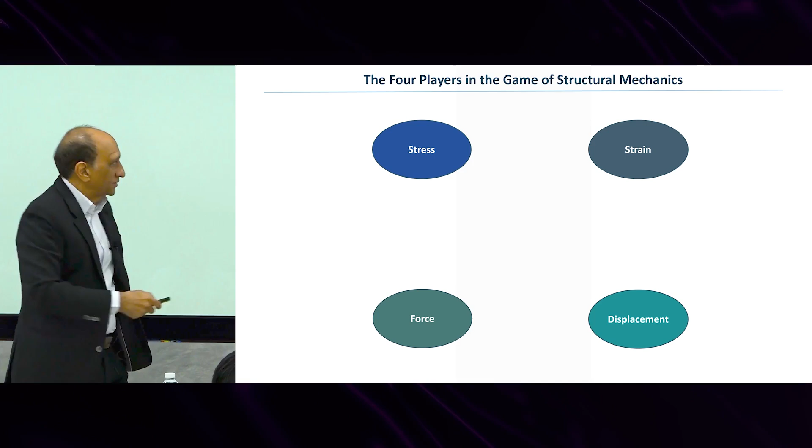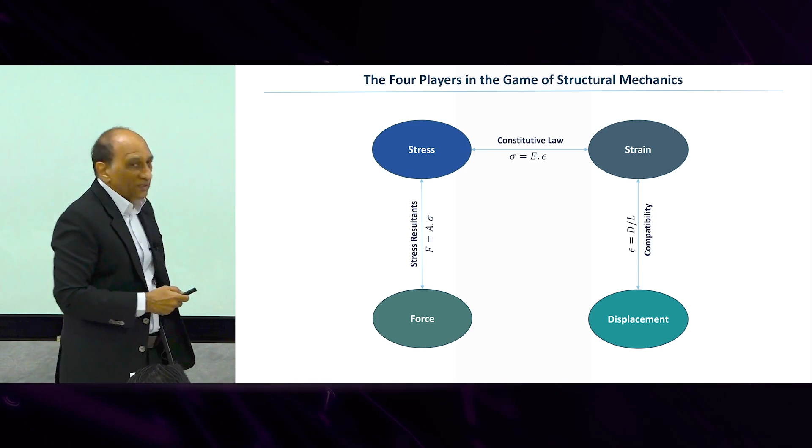Stress and strain is a constitutive law, we all know this basic relationship. The relationship between stress and force is stress resultant. The relationship between strain and displacement is compatibility. And the relationship between force and displacement is equilibrium. So we have these 4 relationships that exist between them.

We can start from one, depending upon what is available and what is not, and move around this cycle. But the problem is, many of these are only good in a linear elastic system. As soon as things become nonlinear, inelastic, many of these relationships in the traditional sense will break down, and that's where the problems start, and we'll have to update them. So we will keep coming back to these 4 players time and again.

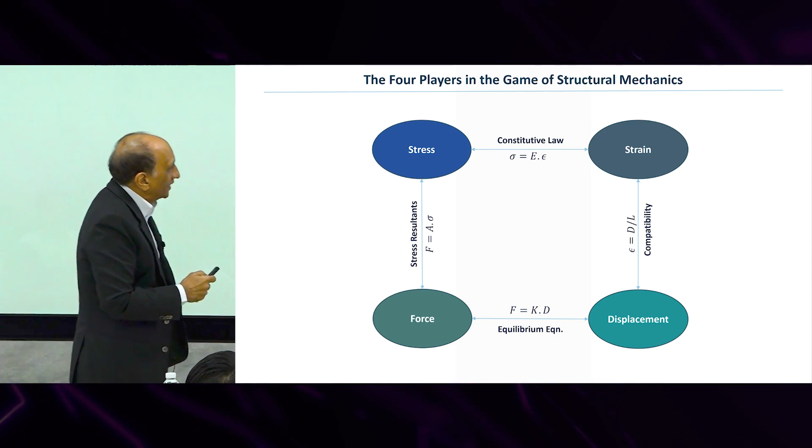Now that we have them, let's look at force to deformation. Currently it's easy: we have the equation for the elastic response, so we can calculate the deflection based on linear stiffness, so it's very clear. We know the force, the moment, we know the deflection, the formula is there, no problem.

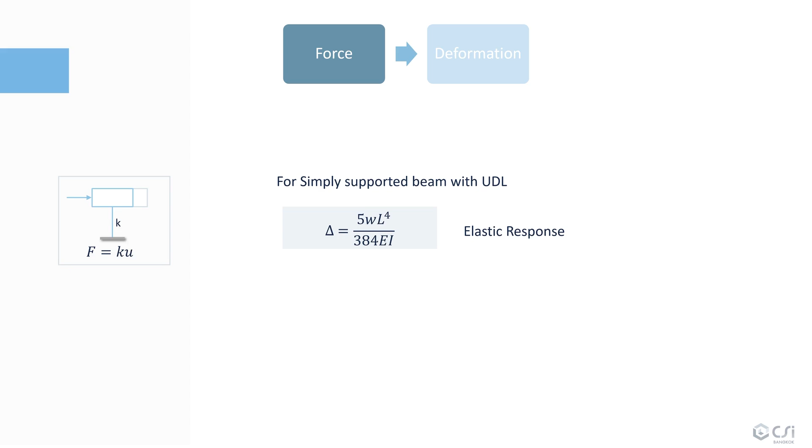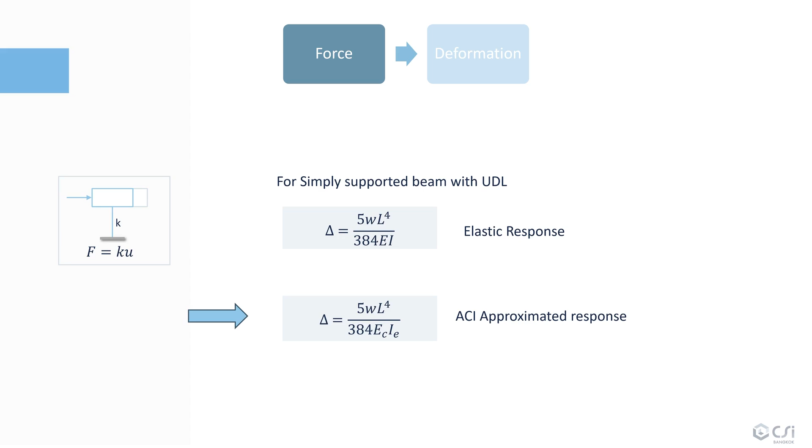But ACI gives us the force and displacement, KU, stiffness equation, and from that relationship we can calculate deflection. But immediately we have 2 different equations for the same deflection now: one coming from the elastic response, the second an estimated pseudo-nonlinear response, which the code tries to capture by replacing I and E with EC and IE.

Both of these are arbitrary, and different codes will do it differently, which means if every code has a different number, all of them cannot be correct. Which means all of them are wrong by simple logic. So something is already missing in this part at a very basic level.

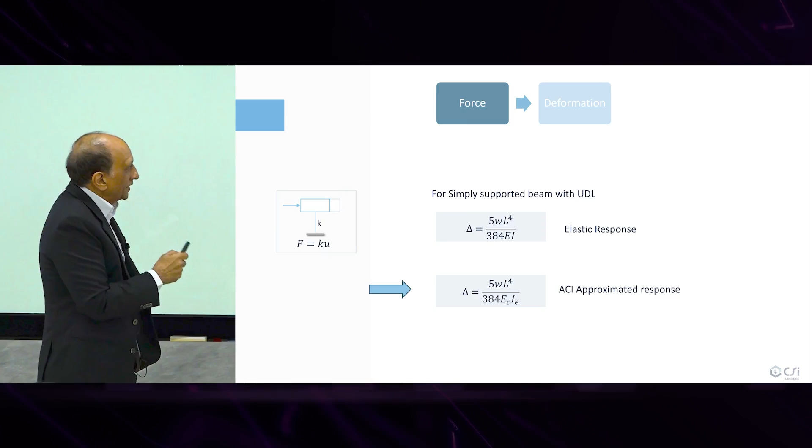So let's go to the second one, this is very interesting: load to stress to strain path. We think traditionally that if you know the load or force, you can calculate the stress, and from the constitutive law you can calculate the strain. This seems obvious, and that's what working stress design has been, and all design in the past has been like that.

But let's see what happens. This is a small column. So we go from applied load this way, load to analysis. In this case, simple analysis: member action, which is simple P, cross-section action, and then stress strain. The area is like that, so stress is equal to P over A.

It's very simple. So if we do that, and try to jump from stress to strain, we need the constitutive law, which is not simply E — it's a stress-strain curve that defines the whole path, not just a simple modulus of elasticity. So if the stress is here, I immediately get a problem: now I get 2 strains for the same stress. Which means the problem is no longer unique, because for the same stress there are 2 possible strains.

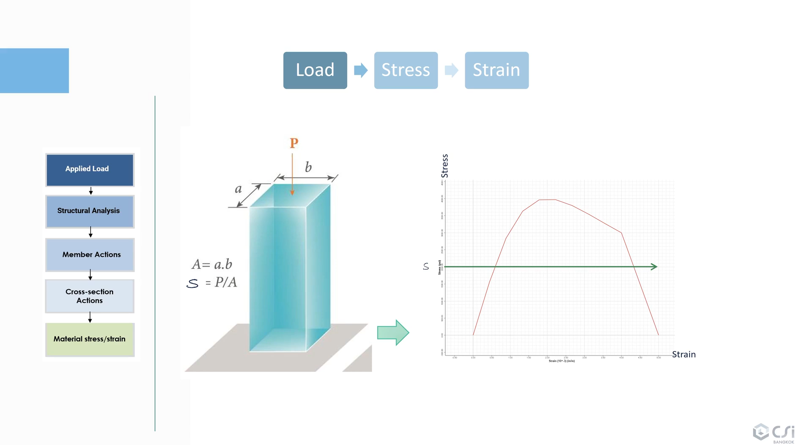And at some stress, there is no strain at all. Which means this is not a reliable way to proceed, because you're not sure of the outcome of this stress-to-strain value. Because once it's no longer linear, E is limited, so for certain stress there won't be any strain available, and for certain stress there might be two strains available, which means this is not a good path to follow, because it doesn't give you a unique and reliable strain.

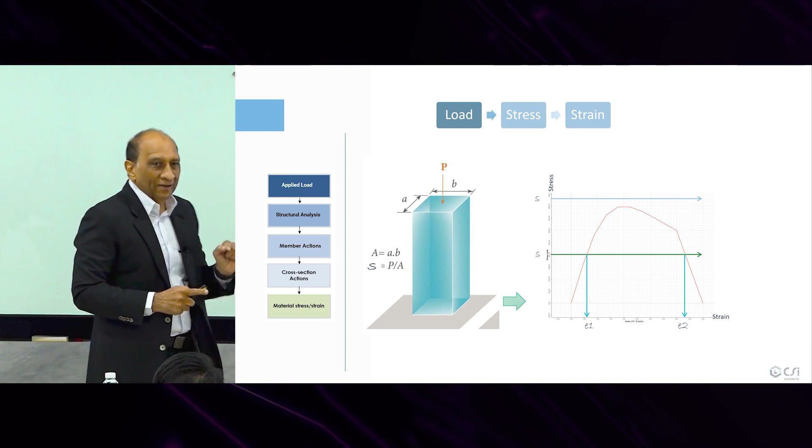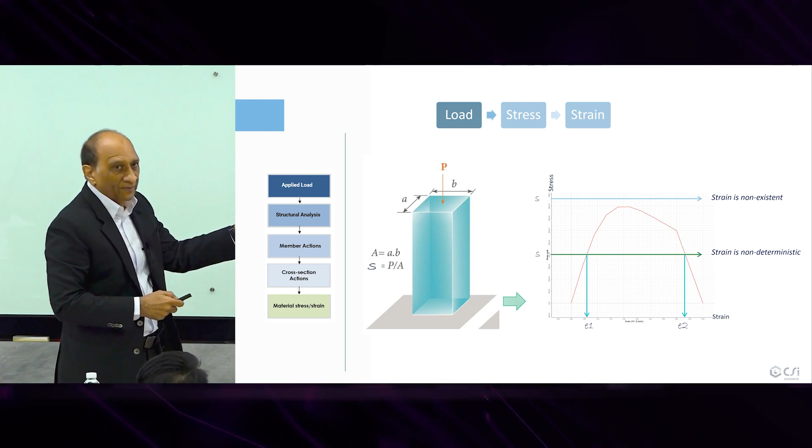So that means we must reverse this. We should do the other way, because strain is non-existent and non-deterministic in that direction. So we have 2 problems straight away. Let's reverse it: strain, stress, to load capacity. Now we have no problem, because if I do it this way, I don't need to know the load in advance.

I have a column on which a certain deflection delta has taken place, deformation has taken place, and for that delta there's a certain strain produced, epsilon equals delta over L, and for this strain I can go to the stress-strain curve and calculate the corresponding stress.

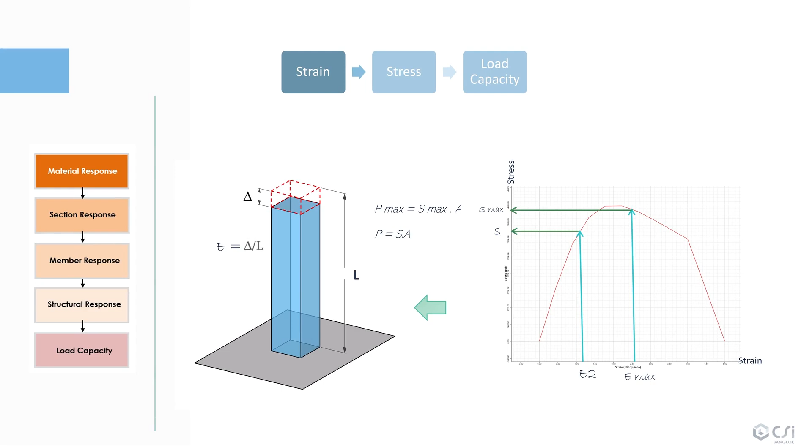This is a unique solution now, that for every strain, as long as the strain is within the limit of the material, I will get a unique solution of the stress, and I can calculate the corresponding capacity from that, and get P max and the capacity. This means a valid solution is guaranteed.

So this is what we follow these days for the purpose of investigation. Start from the material response, go to section response, and then to load capacity. We go material response, which is the stress strain curve, then section response, which is the area, then member response, which includes the length and so on, then structural response and load capacity.

Then we can check that load capacity against the applied load to calculate the real factor of safety that is available. It's like a summary of the pushover analysis, because you calculate the real, true capacity based on the material.

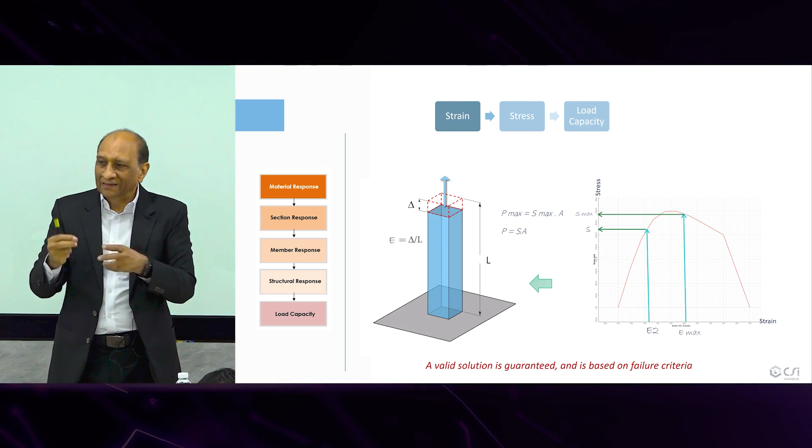So now if you have a particular structure to evaluate, you start with the material, testing actual material numbers, actual cross-section, and you can calculate the capacity very reliably, then compare it with whatever loading you want to compare and see if it's valid or not. This reverse direction works very well, and becomes the basis of all our further development.

All right, so then we get the P from there.

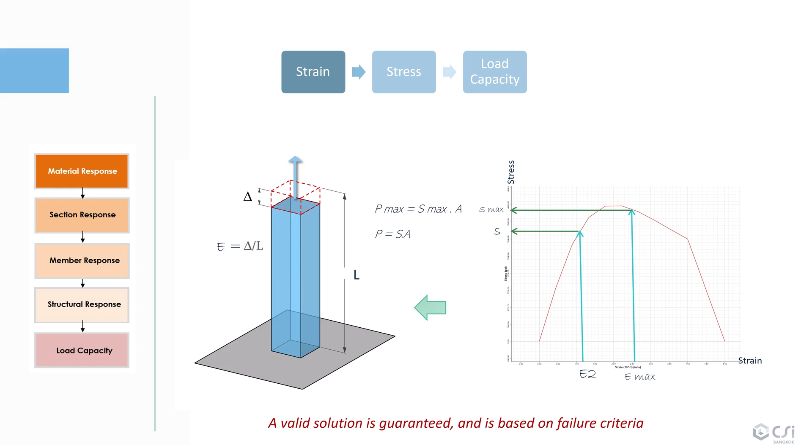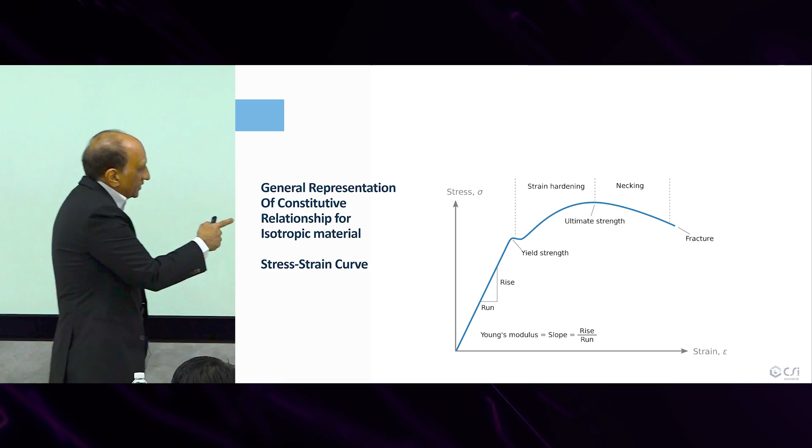For the constitutive law, we know that the stress strain curve has all the information that we need. We have a stress strain curve with the stiffness, yield point, strain hardening, necking, fracture, and this can give you a lot of information about the material, for example ductile, non-ductile, brittle, and all of that, and post-elastoplastic.

So we can define all of that. We can define linear elastic, linear inelastic, non-linear elastic, and non-linear inelastic. So you get four material responses from there, materials of different kind, different deformation type, different relationship type.

So stress strain curve actually gives you all of the information about the material response that you are ever going to need for the analysis. This stress strain curve can be modified by many things, and we will talk about some of them.

So if we have the stress strain curve of the material, we have a perfect starting point for our whole analysis. You have the valid material, and from that you go back and calculate the capacity. So there's no ambiguity problem here, as long as we have tested the material and we have got the capacities.

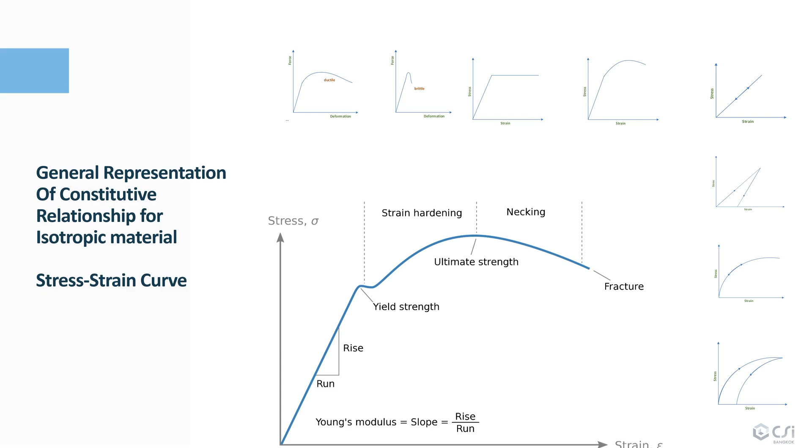Second one is the cross-section. Let's also see how we can unify the cross-section, make it general, because a rectangular beam is not a good sample to start with, since the cross-section can be many things.

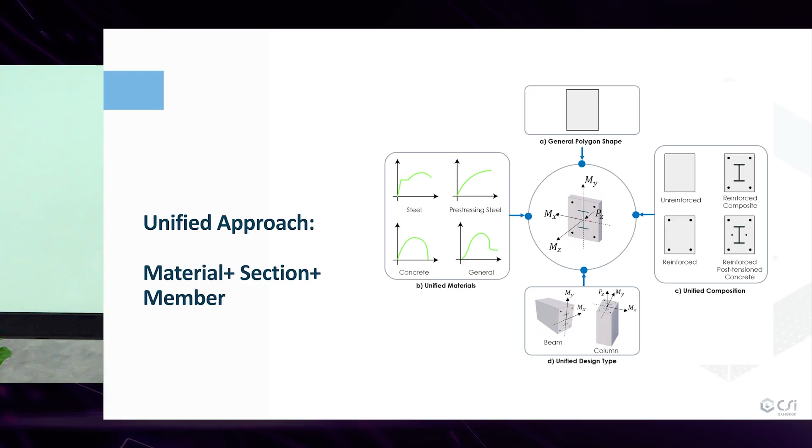It can be reinforced, unreinforced, post-tension, composite. Many things will come up, so many. We need to make sure that we are able to handle a general cross-section, which can include steel, pre-stressing, general materials like carbon fiber or whatever, and concrete of any kind.

So we put the material as a stress strain curve on one side as an input. Polygon, general polygon shape, not rectangle, made from any polygon to define the cross-section, T-section, rectangular, polygon, doesn't matter to us. And then we put the unified type of beam and column, you don't need to differentiate.

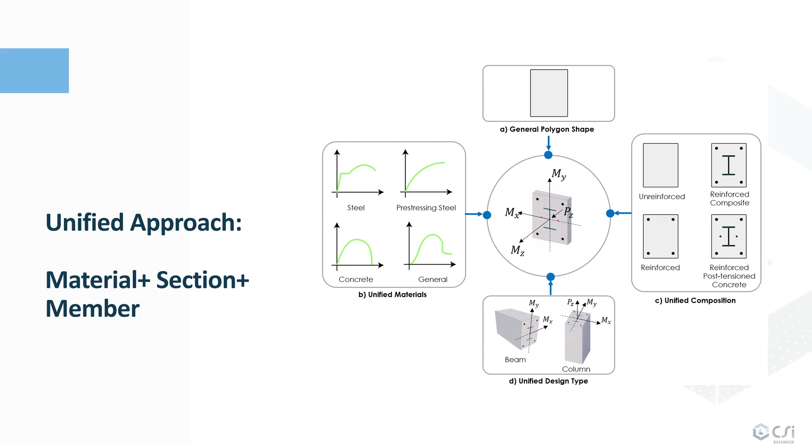We put three stress resultants from there, or five, or from both sides. And then we put unreinforced, reinforced, composite, post-tension, every type of section together. So this is a complete problem definition of a concrete structure of every type. Everything is covered, there's nothing outside this one.

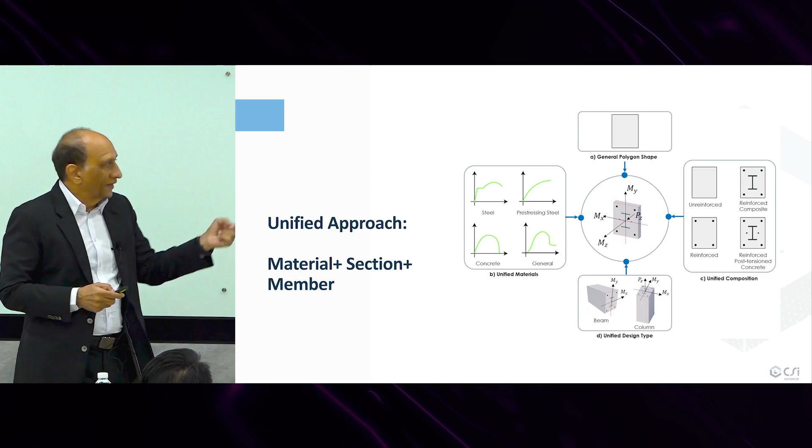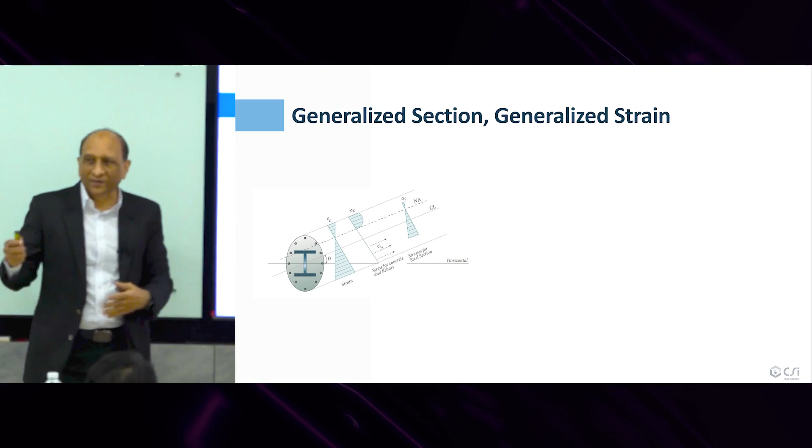So if we take this as our starting point and say okay, this is our cross-section, then we can go ahead and deform it on a certain angular direction for a specified strain, any strain, starting with any strain, just like we did for the previous case.

And then we say, okay, we can come up with these equations for the equilibrium of the stress resultant. So we can integrate all the stress resultants based on that cross-section, based on the material stress strain curve here. This is a strain diagram, this one, this one.

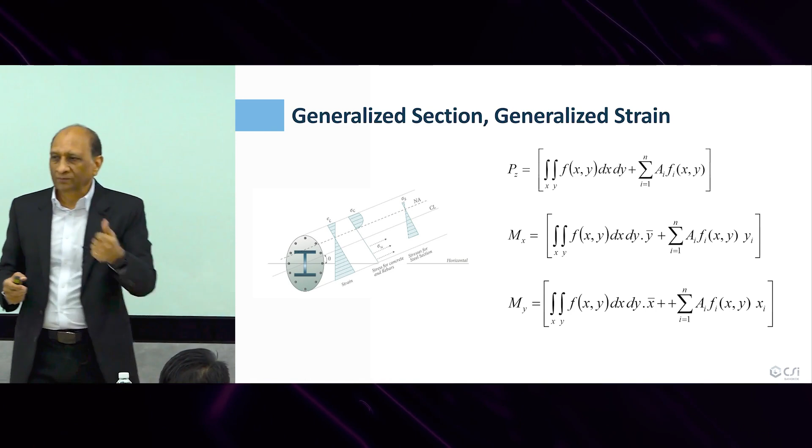Now this equation has the ability to remove all of your typical assumptions in reinforced concrete design. Plane sections no longer need to remain plane, no need to have 0.003 as the limiting strain. So all the 5, 6 basic assumptions in the development of the strength theory or design theory in ACI code, we can get rid of them all and develop an equation which doesn't depend on any one of them. And the same equation will apply to columns, slabs, footings, post-tension, everything.

Okay? Because we started with this cross-section being like that. No matter how many materials we have, we just keep adding them and integrating them. Each individual stress-strain curve, we just add that.

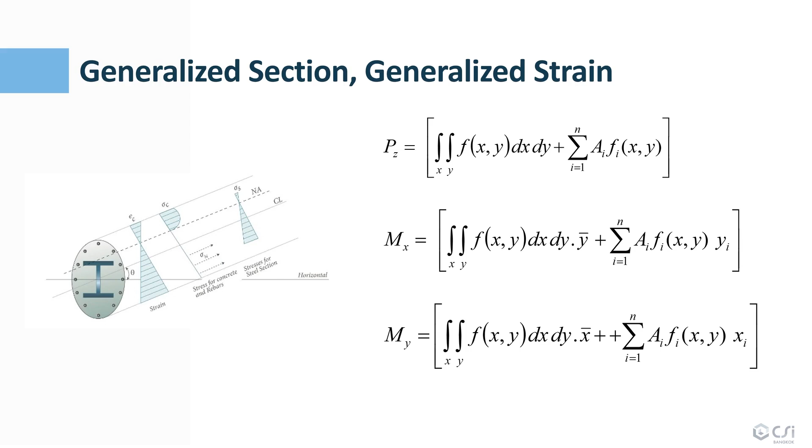So this is the equation that we now have, which becomes our starting point for cross-section level response to be determined from a general material that we defined. And so we can use that and plot them into this surface, and this becomes our capacity interaction surface for a given value of the material cross-section.

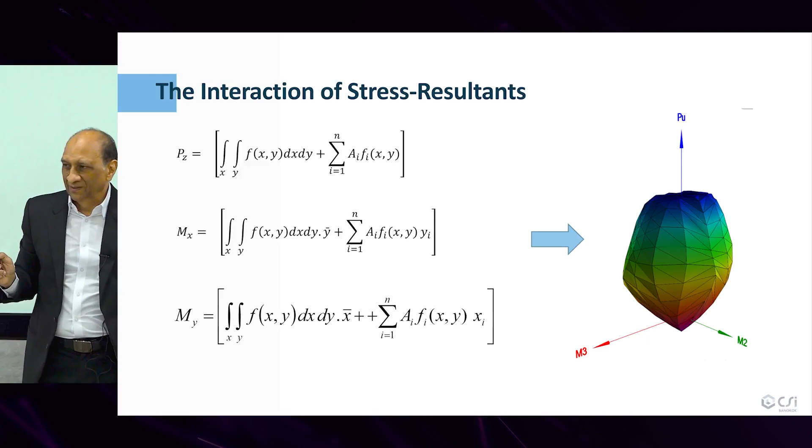So everything has to be known before we can generate that. This is not a good design tool because nothing is known. But for investigation, this is a perfect tool because everything already exists - you know what material is there, what cross-section is there, what the distribution is there. So the evaluation will be perfect. This equation will serve perfectly for investigation.

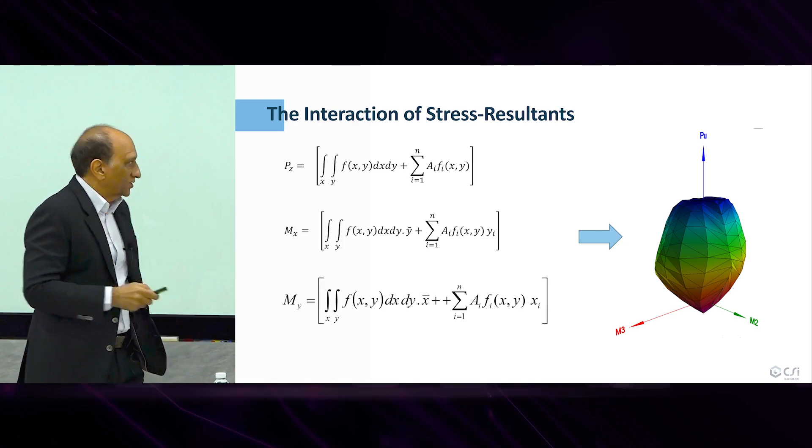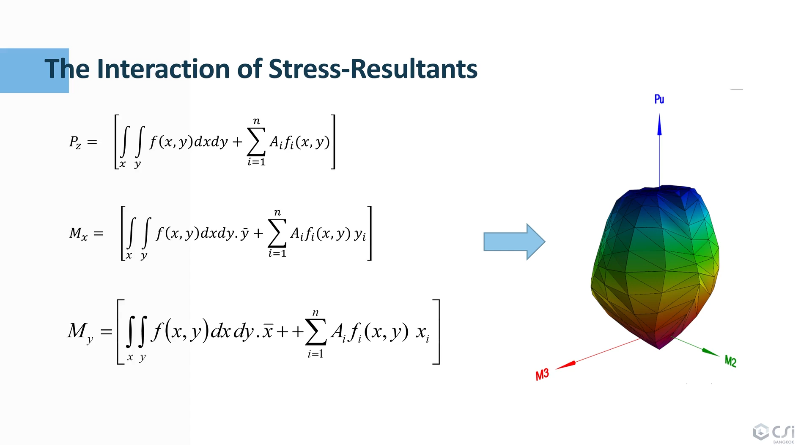So that means now we have the tool to investigate the so-called capacity of the cross-section independent of, and there is no mention of building codes here. This is true, but you can modify it for code. You can add phi factors here, gamma factors here in this equation, and you can have the same equation for different codes. Just modify this by the appropriate phi factors and gamma factors.

So now let's come back to the basic problem and try to apply those equations and see where we can go from there. So come back again to the problem of axial strain.

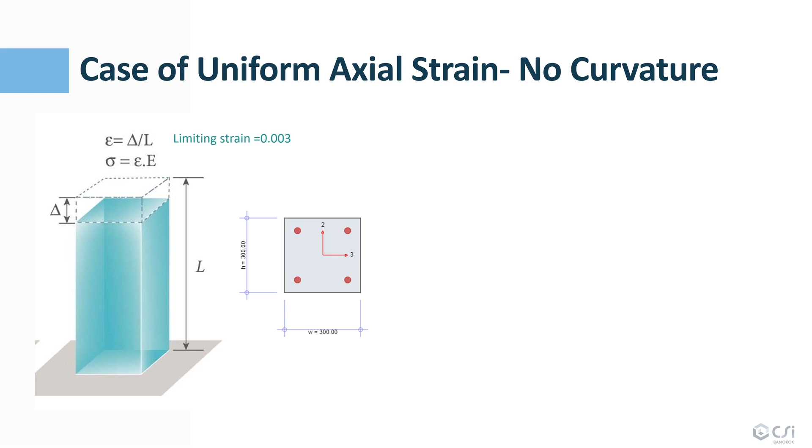So we have a simple prism with some axial strain coming from any deformation that we do not know, but we know that we have one. So let's say strain is equal to a certain value, and from there we have a cross-section that we define. Just for the sake of convenience, we say that the strain is equal to 0.003. It could be any number - 3.5, 3.8, 2.9, doesn't matter. Just for convenience we say the strain is 0.003.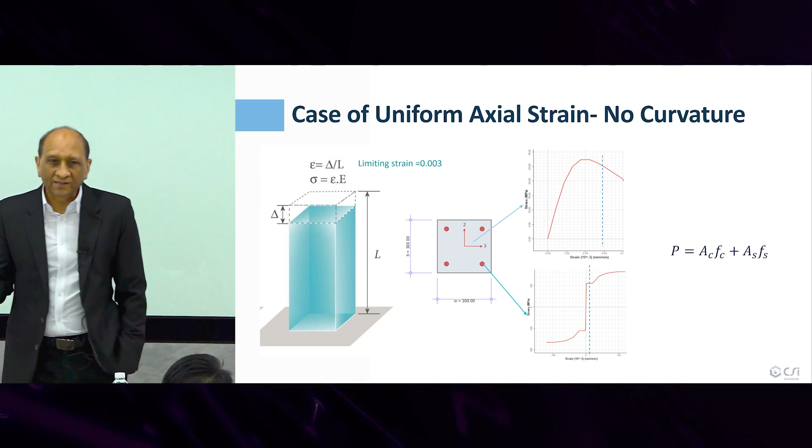And then from there we can go to the stress-strain curve and read two stress-strain curves, one for steel, one for concrete, because it's a composite section. So for 0.003 strain, I'm going to read the corresponding stress from those numbers, and then add them together by this simple formula, and I will get back the axial load capacity. So which means now the whole cycle is complete - stress-strain curve, cross-section, and capacity are now interlinked.

And this can be any strain, so we can read the curve at any strain level. We are not limited to the code-specified limits anymore. So then that goes over there, and this goes over there, which means those equations in simplified form can work this way, and then we get the axial capacity resultant.

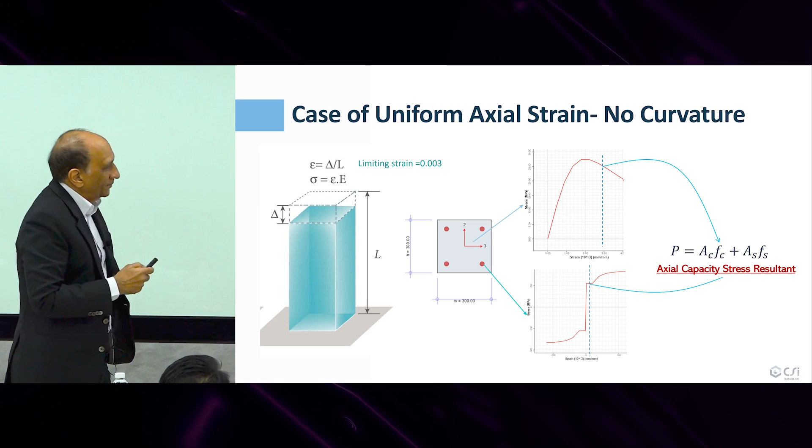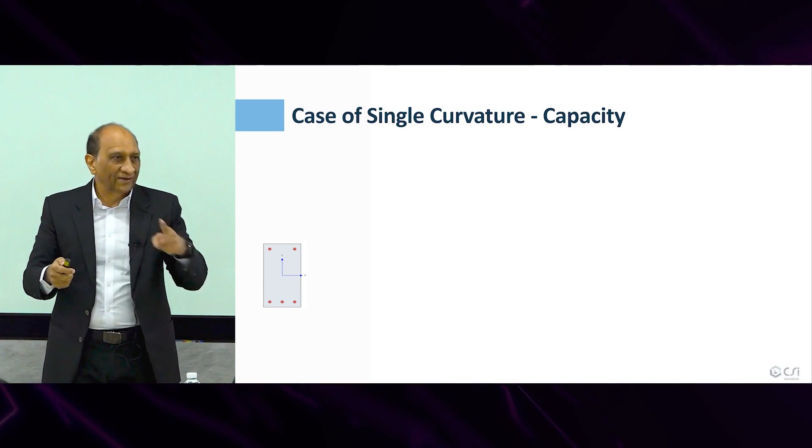Let's go now to the slightly more complicated problem of curvature. Not only axial load, but we assume that it's not just strain, but curvature. So now the strain has a varying profile and is not uniform anymore. In that case, what will happen is you have a beam that we talked about, and you have a strain diagram that might look like this. Any strain profile will be fine.

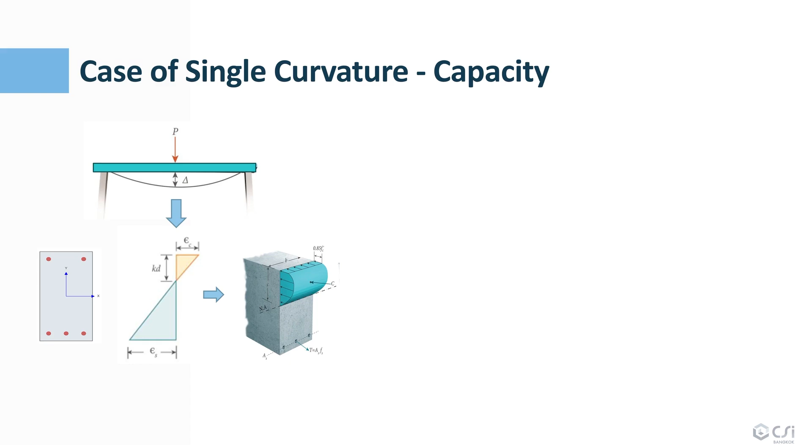And from there, you take this strain profile and plot the stress-strain curve on the cross-section. Variation of the strain from 0 to max will actually get you the stress-strain curve. You take that stress curve, plot it on the cross-section, fill it up on the whole cross-section, and you get this volume of stress. And then you get the same thing, and you put this here. Now we have two things with the strain variation - each level of strain and stress connected through the stress-strain curve. And then we get that, because in this case there's no axial load.

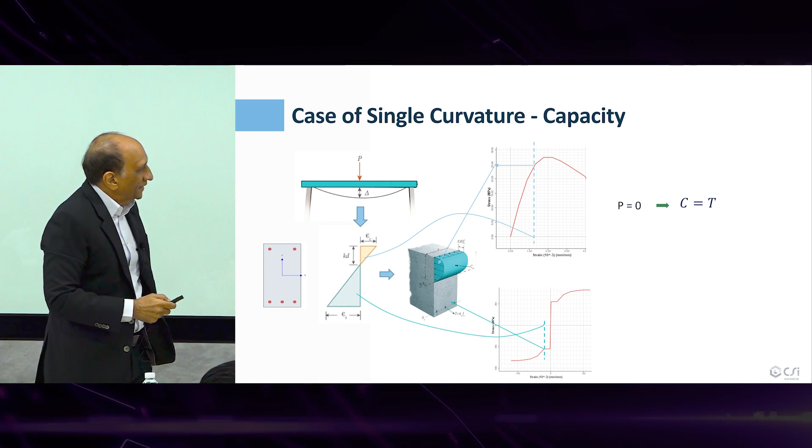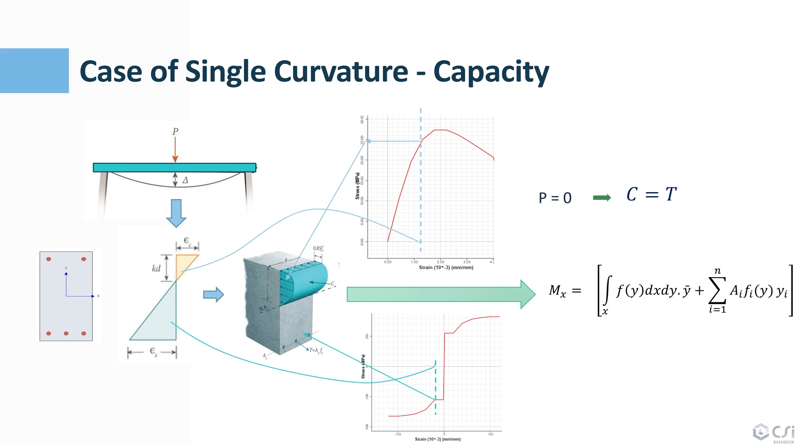With P equals 0, C should be T here. The moment capacity now will come as we integrate the forces in concrete, sum up the forces in the rebars, and multiply them by the corresponding arm. We get the moment capacity from there, the stress resultant. In both cases, we start with an assumed strain, either a uniform strain or a strain profile, and work out the corresponding stress. So now everything is connected and clear.

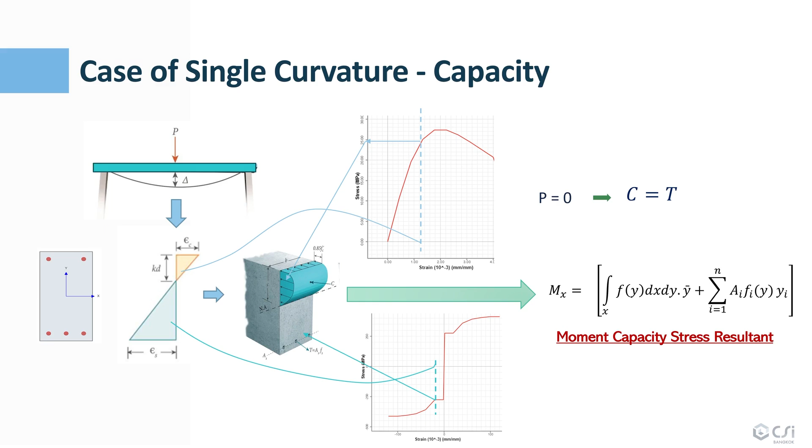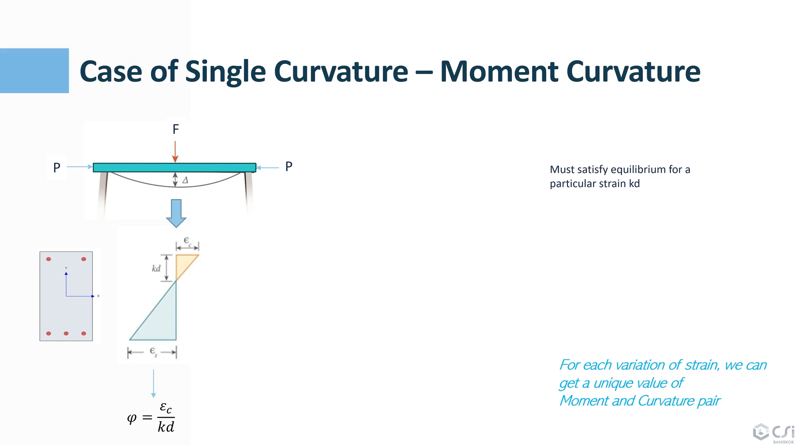Let's go to one more application of the same thing. I changed the notation, so we apply an axial load and we also have F there. Now it's no longer a simple beam, it's a column, with axial force plus the bending moment coming from any reason. The same thing applies, nothing changes, except now equilibrium must satisfy P equals C minus T, not zero, because now we have P. So we have to find the solution that satisfies this axial load, then find the corresponding moment, and get the capacity.

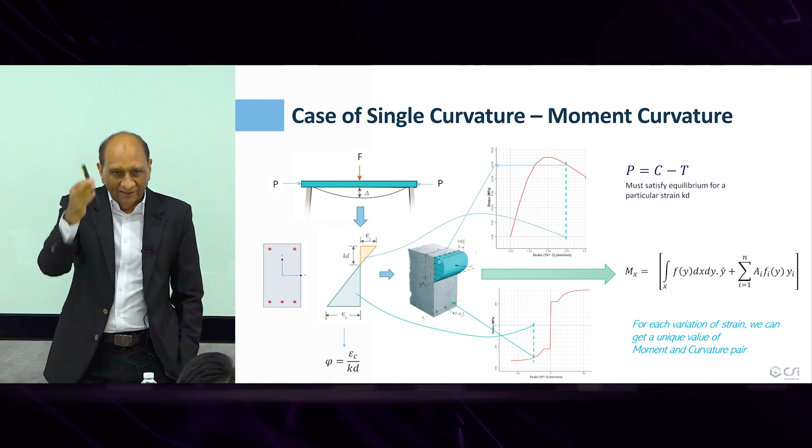We can keep changing the orientation of the strain or the depth of the neutral axis so the strain profile keeps changing. For every variation of strain, we get one value of moment and one corresponding value of curvature, because curvature equals the strain over the depth of the neutral axis, or however you define it. Every time you move the neutral axis, this kd, or change the strain value, you get a new curvature and a new valid moment. So you vary them, satisfy equilibrium of P equals C minus T, and get a valid moment-curvature curve for this section, including the axial load and all the nonlinearity of the cross section and the material.

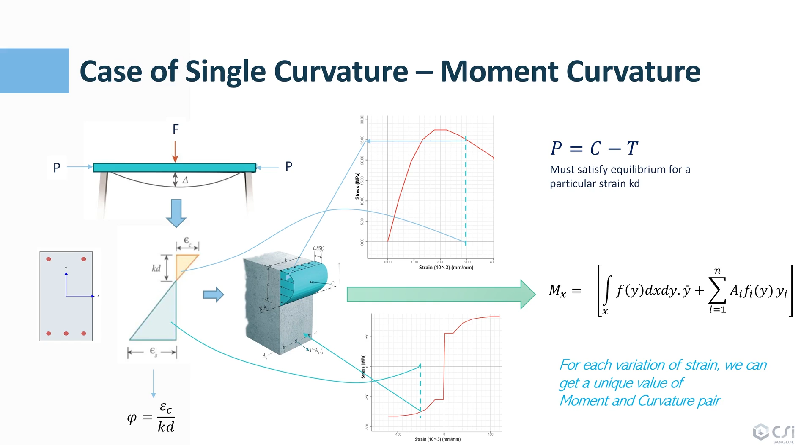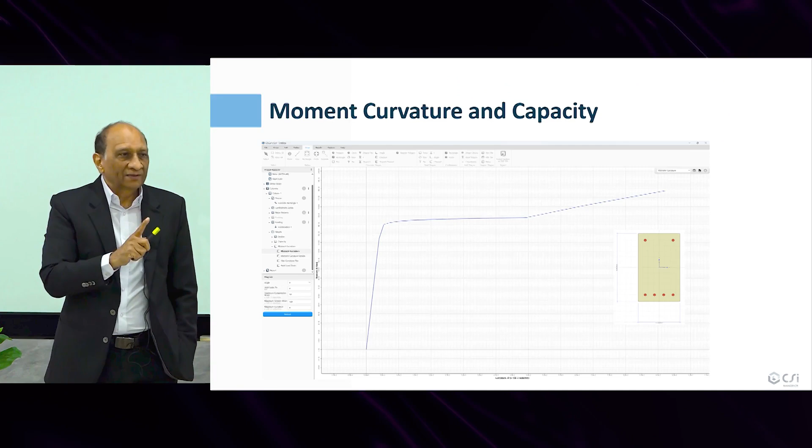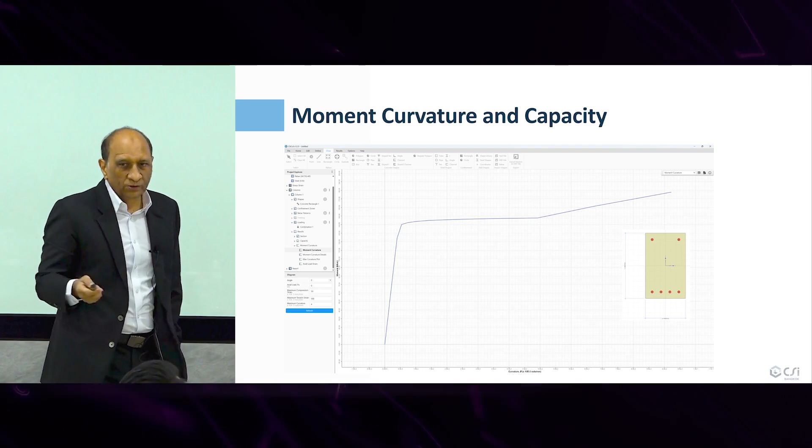This means we get a nice, neat moment-curvature curve for that section using this formulation. So now we have not just one point, but all the points on the deformation line, as we did for the real beam, which we remember. This beam can give you results using CSiCOL, another program you can use for this project too.

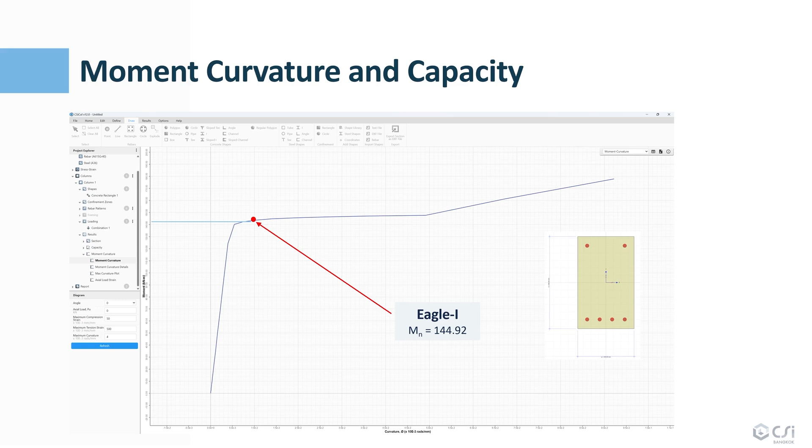I compared the moment calculated by the Eagle-I, and it becomes one point on that curve. So the design moment is one of the points on the moment-curvature curve, but the moment-curvature curve gives you all the points needed to answer all the questions we have about this beam to investigate.

What we are looking for now is what is happening at each point. At each point you can get the concrete compression force, tensile force, maximum concrete strain, maximum steel strain, neutral axis depth, curvature, status of the neutral axis, everything. You have full information about the cross-section behavior at every point along the curve, because we didn't go the strength way, we went the curvature way, generating the moment-curvature from all possible variations of strain and neutral axis that give a valid solution.

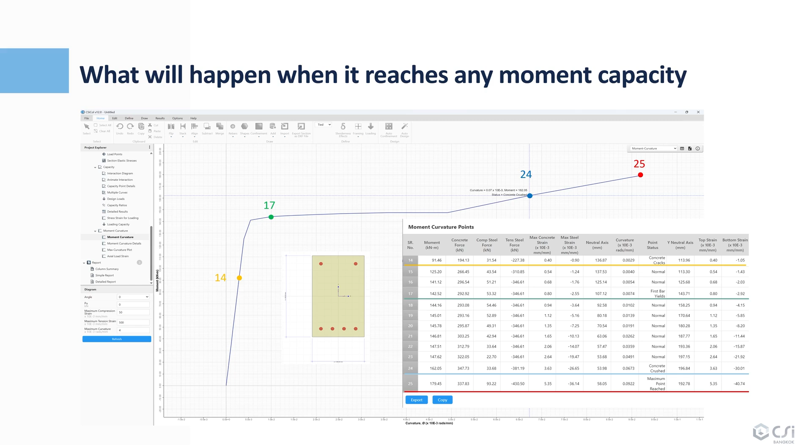So this is a valid response of the beam cross-section from A to Z. You can now study and get everything. These different points give you all the information, and that's what we're looking for: to get a full understanding of the beam through its entire load history. Before cracking, here; before yielding, here; post yielding, this one - whatever you need is there now. That's the advantage of going this way.

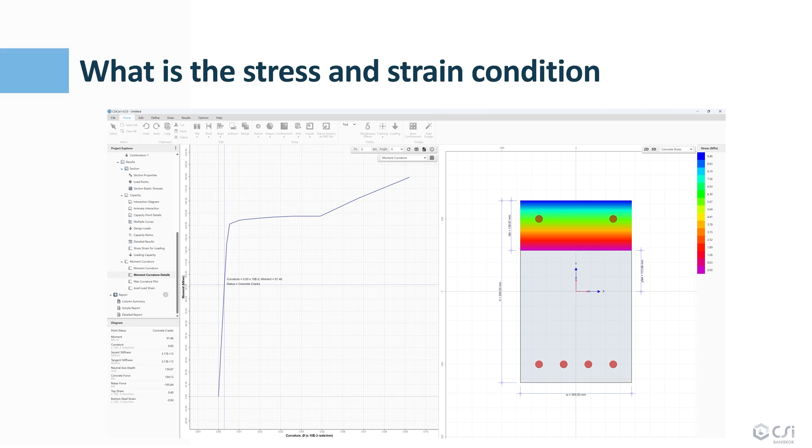You can also see cross-section stresses and profiles, and plot by moving the pointer anywhere on the curve, studying what's happening with the strains and stresses in 2D, in 3D, and so on. If you haven't done it, please try CSiCOL - you can see all of that. So the theory we developed gives us the ability to get a full understanding of the cross section, especially for axial load and bending moment, whether single curvature or double curvature, whichever way you want to do it.